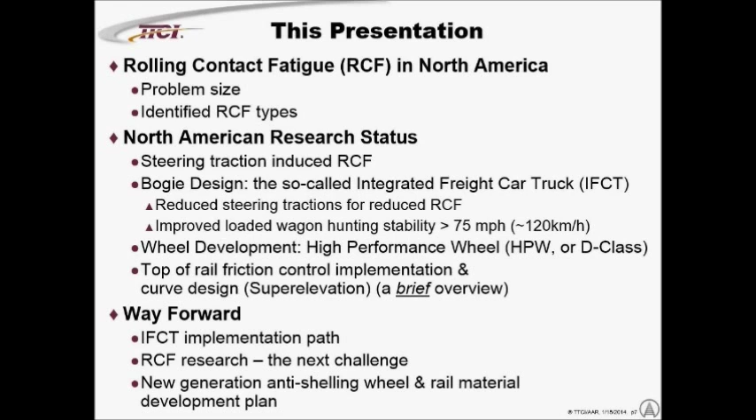And then give you a bit of an idea of what we plan as a way forward, implementing the bogie that we have developed conceptually, as well as where we want to go in terms of rolling contact fatigue research. We haven't really touched it, and we've been messing with RCF for... And where we're going in terms of maybe an anti-shelling wheel, and maybe the metallurgical community here will be interested in that. So, what is our problem size?

Basically, wheel costs in North America are of the order of 800 million US dollars. And of that, we reference this pie chart here, which is audited wheel replacements by damage code. Of that, tread defects are probably 60% of the problem size, and of this, at least 50% is associated with rolling contact fatigue, and results in what we call high-impact wheels. Wheels that go down the track going bang, bang, bang, and which you have to then remove. We estimate that the total RCF-related wheel costs annually in the US is just a little bit larger than 400 million.

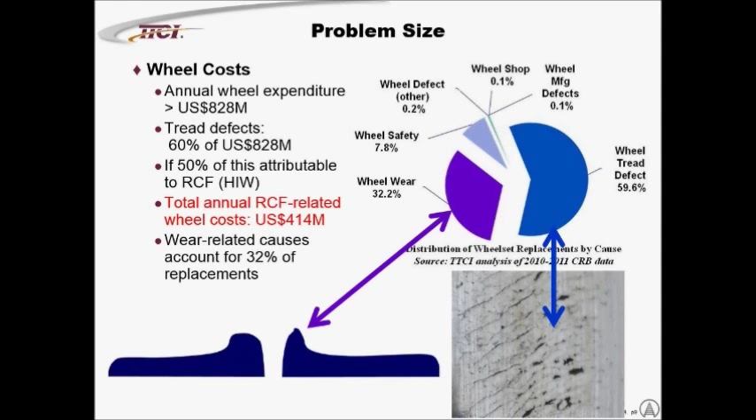Wear is not a big deal. It's something that we would really wish that wheels would be removed for wear. Wear is predictable, somewhat, and what happens when the biggest wear mode that we get is what we term asymmetric wheel flange wear. The wheel loses its steering ability and then moves against one rail in one direction and wears the flange. This is a general wear mode that we encounter in the States, and what I observed in my time in South Africa.

Wheel removals are a big problem in the US. Here we have the incidence of what we call high impact wheels. We have wheel impact detectors that are situated along the track, and if you encounter a wheel above 90 kips, 90,000 pounds on the rail, you need to look to change it out, and you're mandated to change it out if it's above 140,000 pounds. These blue skyscrapers here show you the removals, and you can see that the removals are seasonal.

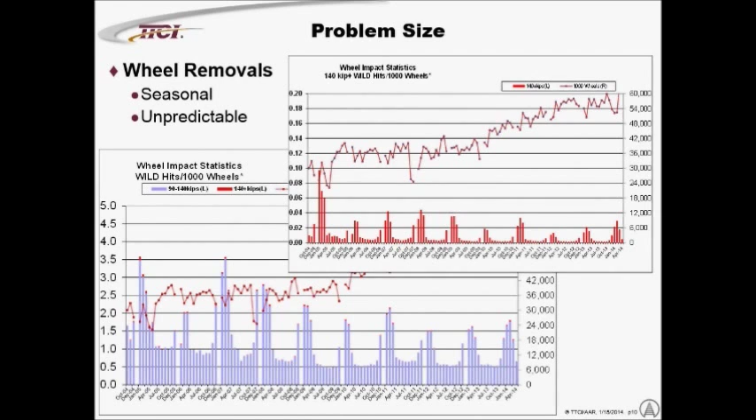They're related to the snowstorms that you encounter in North America, but not that predictable. You don't know which wheel's going to give you the problem after which snowstorm. The blue skyscrapers are the 90 kip wheels, and the red tips on these skyscrapers are the 140 kip wheels. If you look in detail at the 140 kip wheels, you see the same pattern, seasonal in every sense.

If we're looking at the rail costs, annual grinding costs in North America are around about 100 million. And if we look at RCF-related rail costs associated with replacement, totally that's a replacement of 300 million, and 100 million due to grinding. It's costing the industry also about 400 million. So our total problem size in North America relating to RCF is of the order of 800 million.

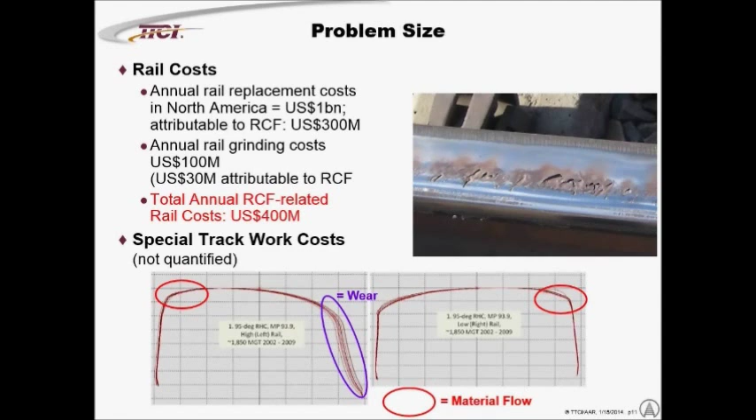What are the damage modes? Starting with the tread and the wheel, it's the easiest one to identify because unfortunately the grinding guys come along and grind the rails and remove the evidence before we have a good idea of it. We have identified three wheel damage modes.

The first, as I mentioned, is what I've termed tread scuffing, and it's associated with surface damage. What happens basically is that surface-initiated cracks form - we call them cracks, they're actually wear-related, and I will explain that a bit more. They then develop into cracks that go beneath the surface of the wheel, and eventually bits and pieces of the wheel fall out and cause so-called high-impact wheels.

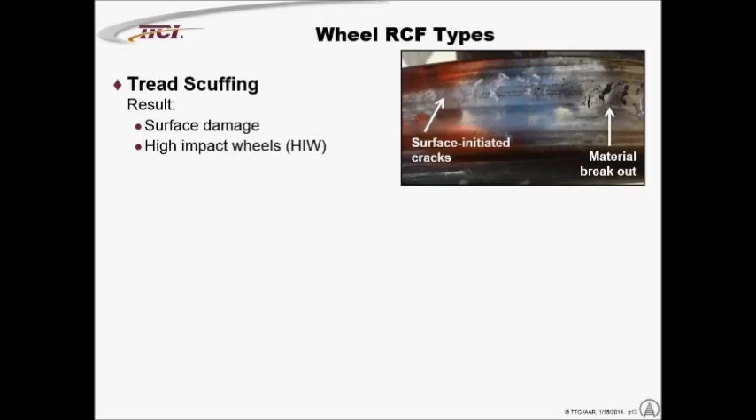There's a very closely related failure mode, which is tread shelling, associated with the Hertzian maximum shear stress beneath the surface of the wheel, and related to subsurface fatigue. What happens there is that we get delamination of the wheel. This white square here shows the delaminated portion of this tread, identified by ultrasonics. What happens then is that the delaminated portion breaks out also to form high-impact wheels.

Incidentally, if it doesn't break out, it forms a vertical split rim, which is something we'll talk about a little bit later. Then we have identified a further mode, not all that prevalent, which I have termed continuous spalling, and it's almost a skidding of the wheel.

You can see that - well, what happens is that we get little cracks forming there. It's related to heating and quenching of the wheel surface to form martensite, and this rather brittle layer then starts breaking out. It occurs under light car conditions, under empty wagon conditions more than under loaded conditions. It's currently classified as tread shells in the American jargon, just because the damage looks a little bit like a shell and is longer than 1 inch in one direction, although it's not very wide.

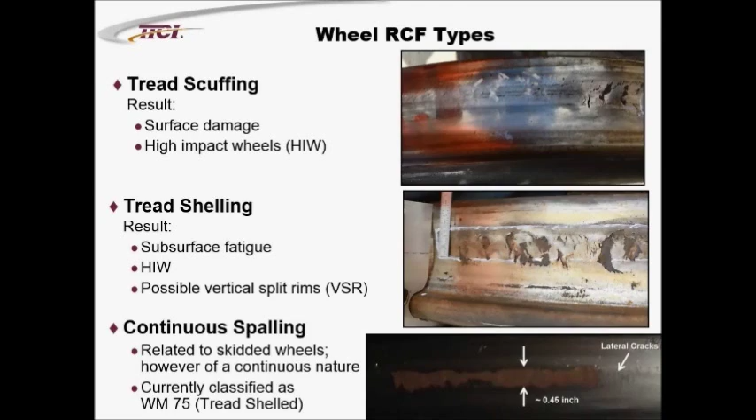As far as the rail goes, we start with something which we think is very much related to the scuffing that we see in wheels, and it generates these patterns on the rail. This is dye-penetrant of the rail, and then bits and pieces break out very similarly to what happens with the wheel.

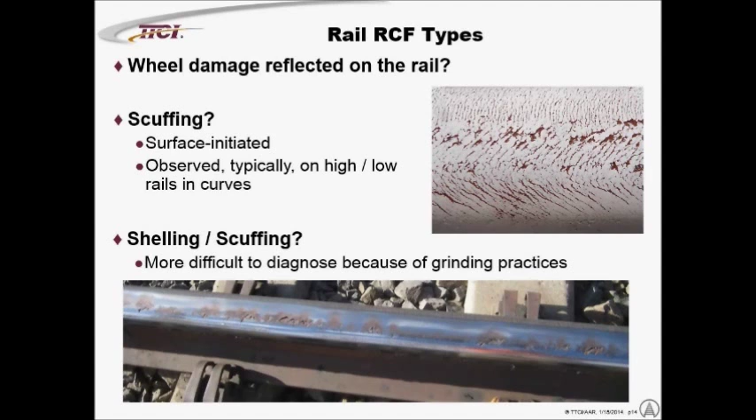And then you've got shelling as well, related to scuffing. This is a particularly bad section that we didn't grind, and this is typical of the damage.

So let's start with what we're doing about things, and we'll start with the scuffing damage, which we are addressing primarily by looking at improved bogie designs.

Before we start off, I want to define something which is what we call the traction ratio, which is the ratio of the net vector sum of the creep forces between the wheel and the rail, divided by the normal force. You can think of it as a demand for adhesion. It is not the coefficient of friction. I'll refer to it in this talk as T/N traction ratio, so we know what we're talking about.

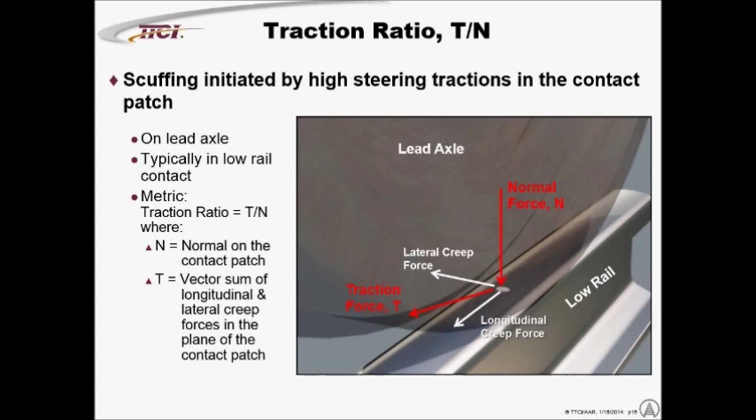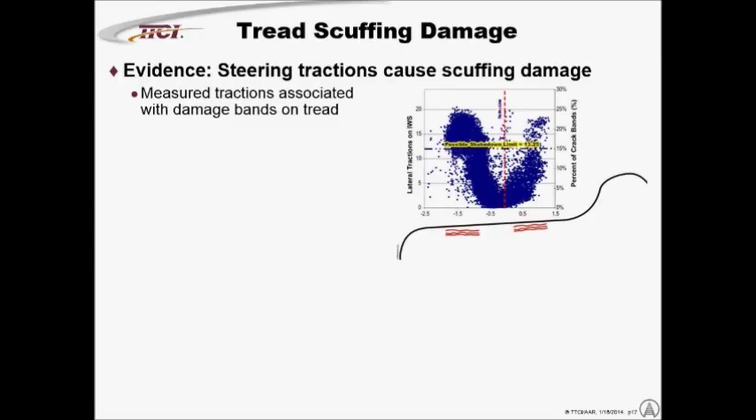If we start looking at the damage that occurs on the wheels, we find that it occurs in two bands on the wheel, a primary band here and a secondary band here. We've collected evidence as to the relationship between damage and the steering tractions. This is a scatter plot of the measured steering tractions using an instrumented wheel set, and you see that the highest steering tractions are associated with these two contact bands. So I'm just giving you a couple of pieces of evidence for the relationship with steering tractions.

Next is some data from a set of cars that ran in coal service, predominantly in one direction, 80% loaded. I looked at the wheel removals - miles to removal against the number of wheels removed for high impact wheels. You can see that axle 1, which is the lead axle in the vehicle, is experiencing a lot more removals than axle 3, which is the lead axle of the trailing bogey, the next one subject to the higher steering tractions. Axles 2 and 4, which just go along for the ride, as it were, would probably show almost nothing if they hadn't run 20% loaded in the other direction.

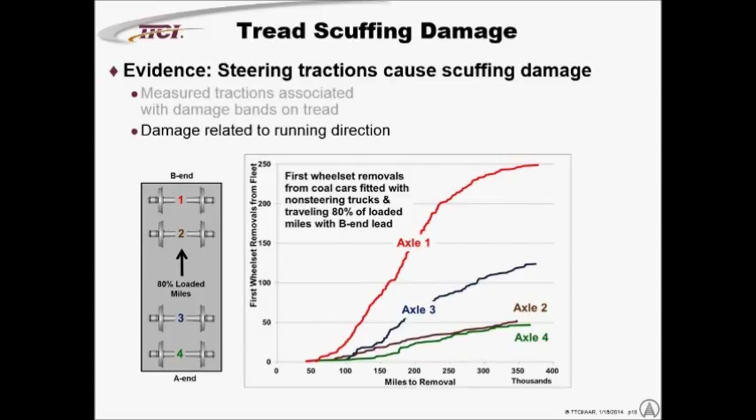So there's some more evidence of that relationship with steering tractions.

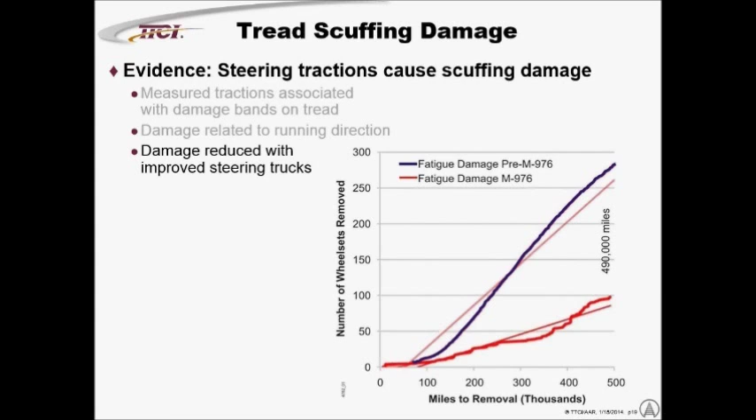Here we have the comparison of wheel removals over a period of 500,000 miles, comparing a traditional three-piece bogey with a bogey that has better steering performance. You can see again that there's a direct relationship to steering tractions.

We've also experimented with this. I borrowed a rolling rig up in Canada and introduced steering tractions between the wheel and a set of rollers underneath the platform, plotting the relationship of the steering tractions to the angle of attack of the wheel set.

That's the angle that the wheel set takes up on the track relative to the longitudinal centerline of the track. You can see here that as we get into high tractions on the order of 0.3 to 0.4 demand for adhesion, the wheel moves from a typically burnished surface to one that develops pitting on the tread surface.

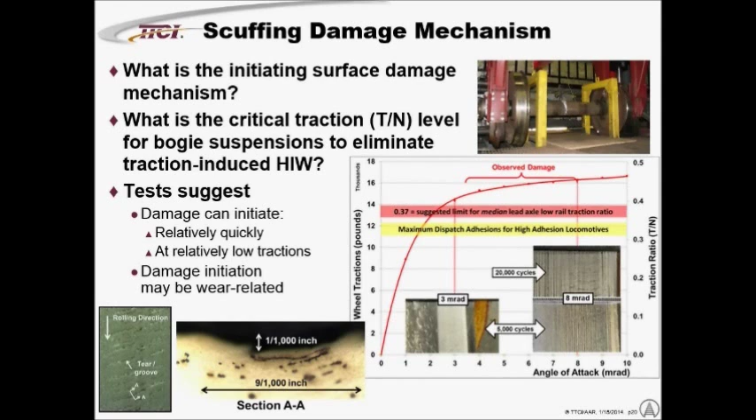And these pits are not cracks, they are actual erosion pits in the surface of the wheel, associated, I believe, with stick-slip, a sort of semi-micro corrugation under these high traction loads. To understand this a bit more, we need to dig into the so-called creep theory.

In creep theory, we look at the relationship of the relative slip between the wheel and the rail and the traction that is imposed. I've got a little video here which gives an idea of what's happening, because in the contact patch between the wheel and the rail, we see both adhesion and slip.

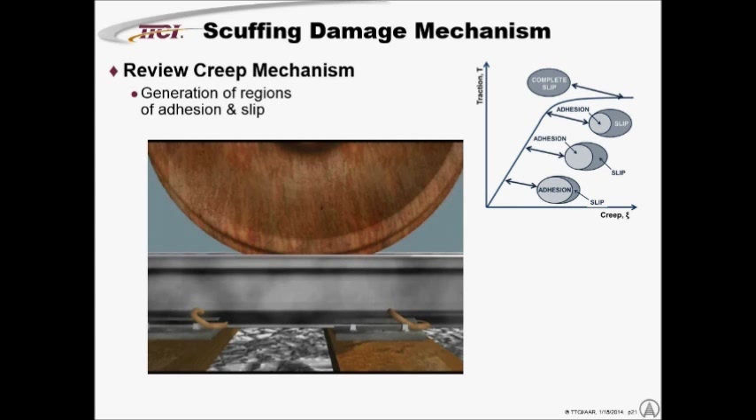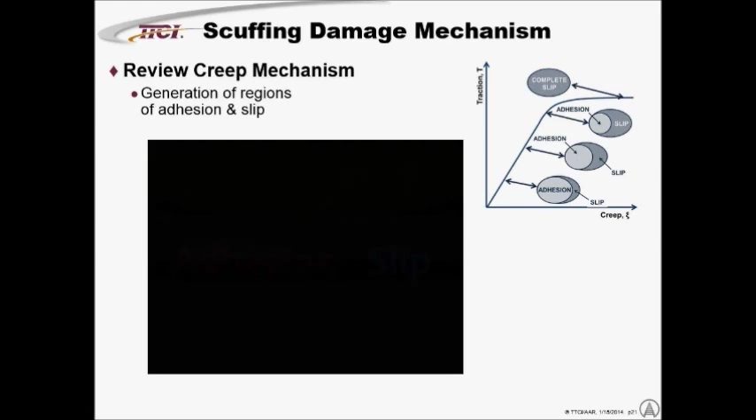Some people find it difficult to visualize how you can get adhesion and slip simultaneously. Here we see the wheel rolling on the rail, and elements of the wheel and rail come into contact in different states of strain. As they roll through the contact patch, the relative strain between the wheel and rail increases until slip occurs on the trailing edge of the contact patch. If you look deep into the contact patch...

you will find that there's a normal pressure distribution over the contact patch. But if you look in the area of adhesion and slip, you can see that relatively high tractions occur in the contact patch, even with relatively low overall tractions. So you're getting limiting slip incrementally, specifically at certain places in the contact patch.

We've done a contact patch analysis of the stress state on the surface of the contact patch, and you'll see that at the transition between the area of adhesion and the area of slip, we generate von Mises stresses on the order of 180,000 psi — for those of you who are metrified, that's pretty close to the UTS of the steel.

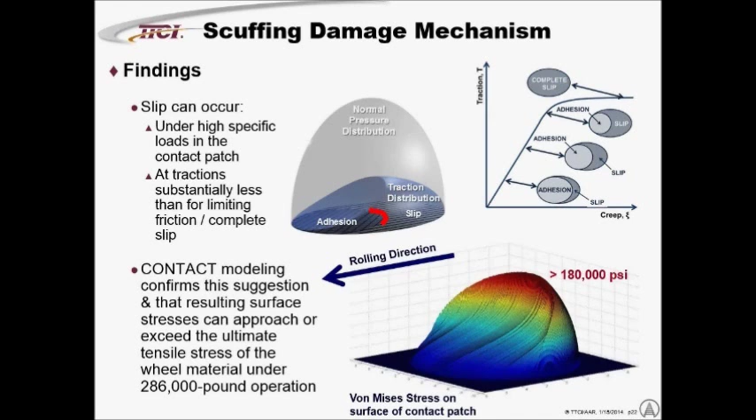So I'm thinking that what we're doing is ripping bits and pieces out of the wheel under these conditions, and that's initiating rolling contact fatigue.

Typically, if you look at the UTS of steels at room temperature and at elevated temperatures due to braking of the wheel, and plot that against the curvature in degrees of the curve the vehicle is trying to steer through, you find that when we plot these surface stresses against the curvature, rather than against the creepage, we're reaching very high stresses beyond ultimate in 4, 5, 6, 7 degree curves.

And that is when everything is going well — that's not even when you're traveling at underbalanced speeds and so on. I'll talk to that a little bit later.

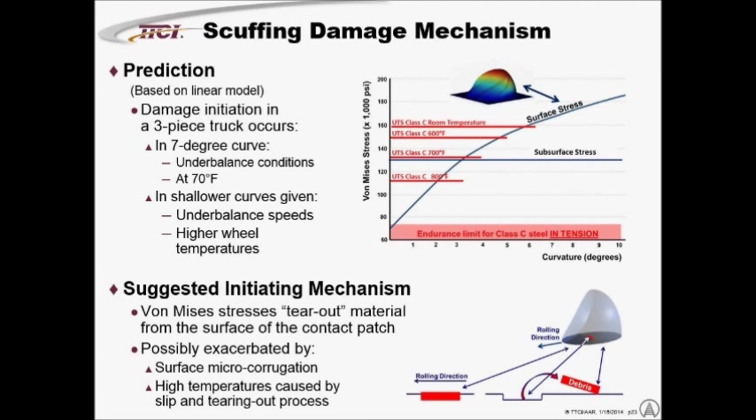So what we think is happening, and what we want to pursue, is that these very high stresses result in material being torn out of the surface, much as I showed in that cross-section a couple of slides back. This may be exacerbated by micro-corrugation, high temperatures, and so on, creating a void in the surface of the material, and that void allows the material to flow.

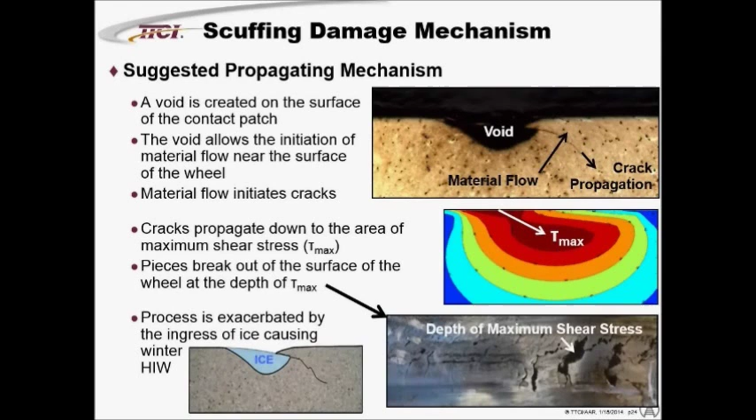And when the material starts flowing, you can begin initiating cracks. If you try to conceive of cracks just appearing in the contact patch without a void, it's very difficult, but if you think of a void, that's definitely an initiator. These cracks are then driven down to the maximum shear stress and break out of the surface. We believe that ice forming and being pressed into these voids accelerates the generation of cracks and the initiation of high impact wheels, as we observe in service.

So we're coming to the conclusion that maybe this damage mechanism is not a traditional fatigue problem. It's maybe a wear-related problem initially. The damage that you can generate in the experiment on the rolling load machine, you can get that damage after 5,000 cycles. It's as early as that.

And so the damage is also statistically related, because the high load cycles on a particular spot on the wheel have got to occur repeatedly on the same spot as the wheel is rotating and as the dynamics of the wheel sees the track. They are associated with low rail contact and not with high rail contact. So you've got to relate the number of load cycles also to left and right hand curves.

The vehicle is also either loaded or not loaded, and it's operating in a lead or a trail manner. And then, of course, you've got the incidence of curvature, which drops off very rapidly in North American conditions. So you've got to get all of these things coming together in order to generate these high impact wheels.

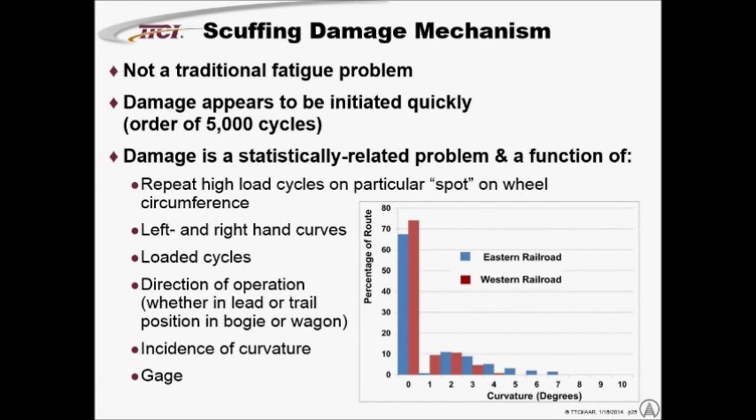What are we doing about it? We developed a design concept which is based on the three-piece bogey, which you typically use in freight operations. And the three-piece bogey has a lot of merits. It's rough, it's robust. Its particular design allows it to go over very uneven tracks, which you typically find out there.

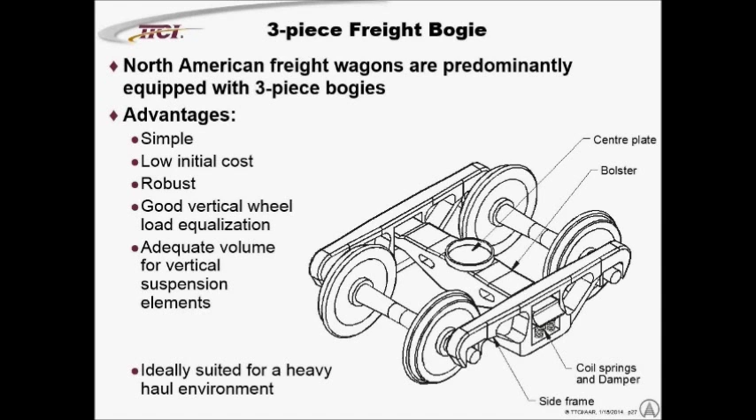And it has the property of having the coil springs and the dampers in the system located only at two points in the bogey, and also where there's a lot of volume to accommodate the deflections and the volume required for very high heavy axle load conditions.

So the disadvantage, though, is that the wheel set can take up an angle of attack, and when it does so, it slides laterally against the flange and continues to slide on the low rail, developing a lateral creep force, and this is the force that starts to generate the damage that we talk about.

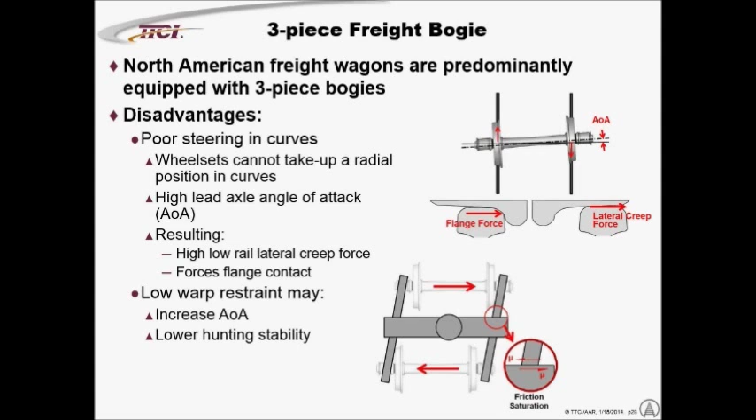The other thing that it does, which is undesirable, is that it has what we call a low warp restraint. That means that the two wheel sets can move laterally in opposite senses relative to each other, and that initiates certain instabilities and poor curving modes that we'll touch on a bit later.

So what we did in our design was to introduce what we call an adapter pad on top of the adapter, and that allows the wheel sets to angle themselves somewhat radially in the curve and reduce the angle of attack and reduce the creep forces between the wheel and the rail.

It's not a radial truck. I worked for 20 years in radial truck design, and the radial truck does a lot better than this particular bogey, but it's a lot more expensive, and costs and benefits need to be considered.

But as soon as you relieve the longitudinal constraint of the adapter pad on the wheel set, you set up the ability of the wheels to start hunting. It's a lateral instability of the wheel set on the track, and in order to avoid that, we have introduced—

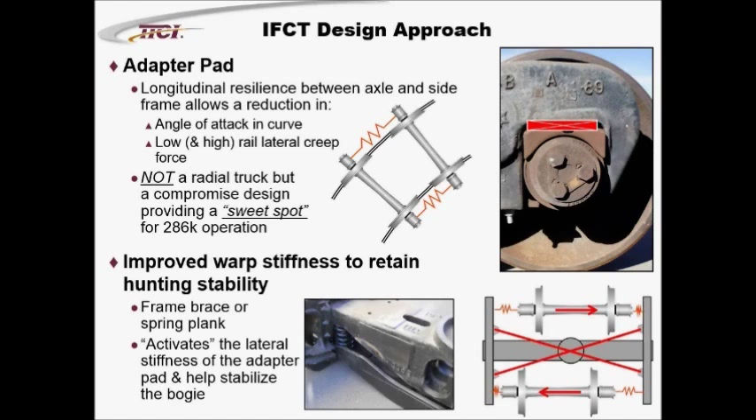in the design concept either frame braces or a spring plank which holds the two wheels laterally in a lot stiffer mode, and in doing so enables stability of the vehicle. In our jargon, it activates the lateral stiffness of the pad, and the lateral stiffness of the pad introduces reaction forces on the wheel set, which then stabilizes the wheel set.

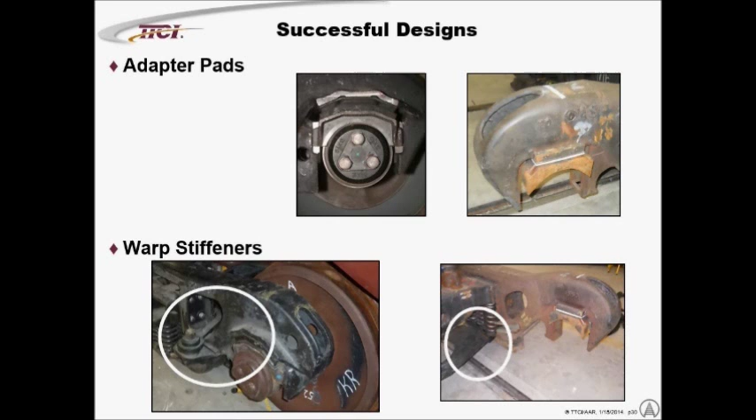Then the next thing is to say, well, okay, we've got these things. How do we evaluate a new bogie? What we've done is we put together two loaded cars, one after the other, one with a standard three-piece truck underneath the vehicle, and the other with what we call the improved freight car truck, and we then compare them as we roll them around the track.

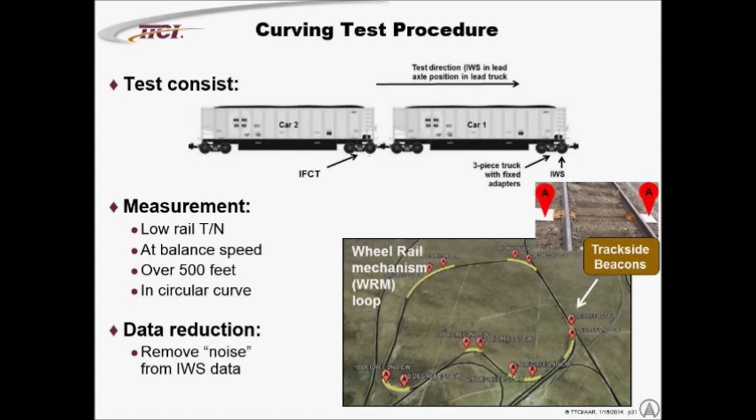And we've got this track out at TTC, which is what we call the wheel rail mechanism loop, and it has a number of different curves from 12-degree curve down to 3, and we precisely measure the steering tractions in the circular curves and then compare them, as I'll show you a little bit in the next slides.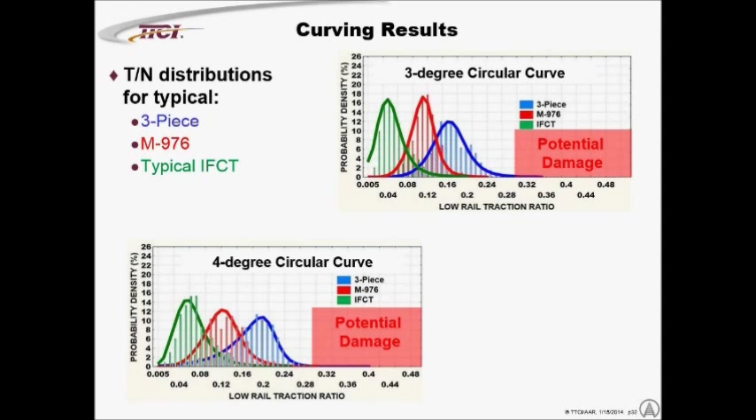In a 4-degree curve, the tractions become somewhat higher, and in a 5-degree curve they are in turn higher, and you can see damage starting on the 3-piece bogey. Then in a 7.5-degree curve, we still are able to maintain reasonably low tractions.

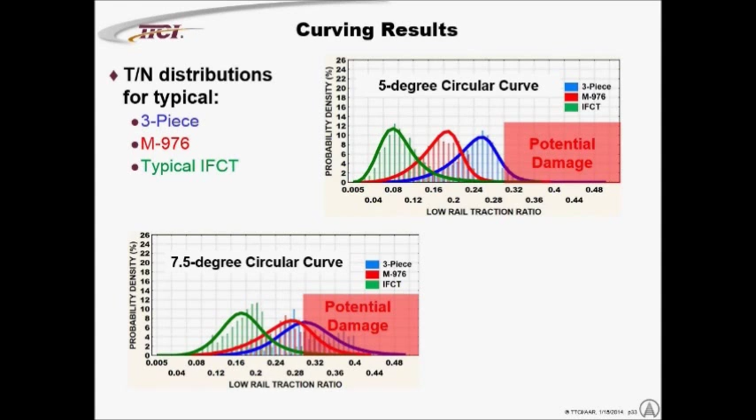In the tighter curves, 10 and 12-degree curve, we don't really get much improvement. But as I said earlier, this is not a radial bogey, it's a self-steering bogey. This is a compromise for the American environment.

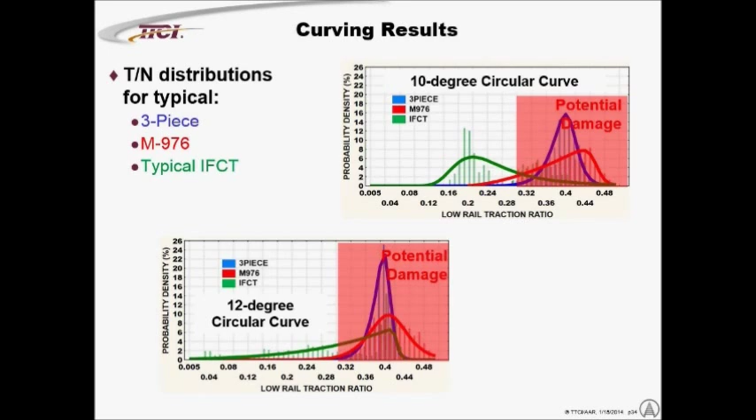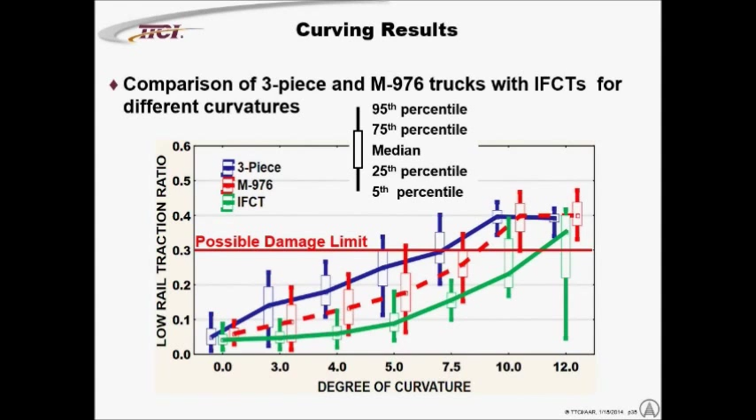This is a summary of all this data in terms of the degree of curvature against the traction ratio generated. The blue is the plot of the medians of traction ratio for a 3-piece bogey, this is the so-called M976, and this is our improved freight car truck. So we get much improved steering tractions between the wheel and the rail.

So basically, we have a vehicle that can curve properly and is stable under empty conditions. It's also stable under loaded conditions.

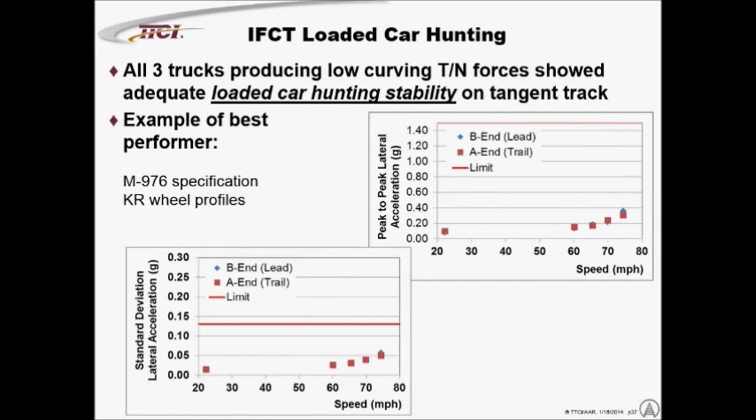Then we go into the rather obscure test regimes we have in North America for pitch and bounce, twist and roll, where we excite the vehicle suspension at or near the resonance frequency. Because we have only friction damping, it's quite a tough test to pass.

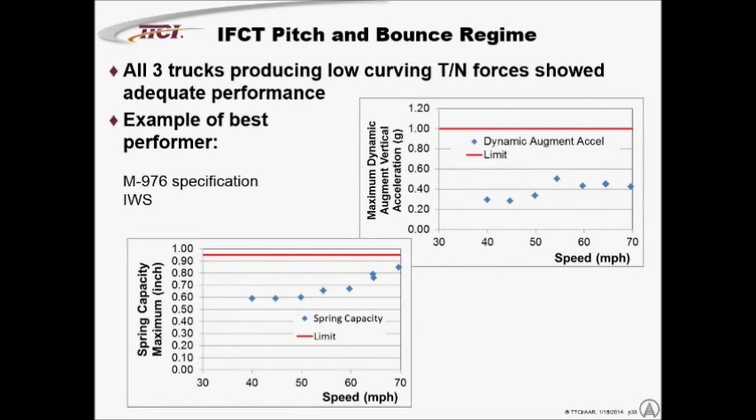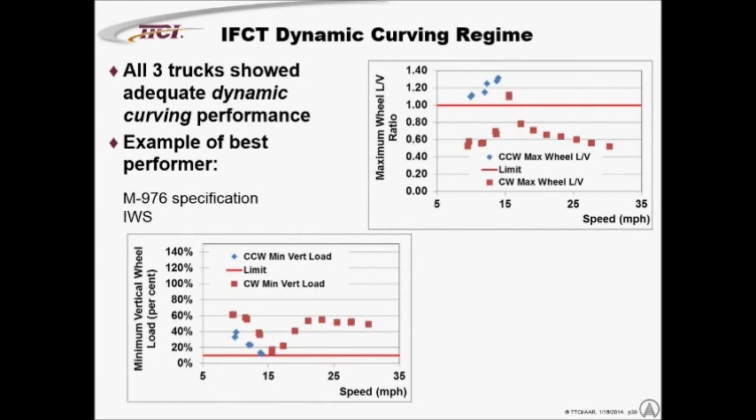You can see it does pretty well here. There are issues in dynamic curving where we hit resonance at 15, 16 miles an hour, and we lose our vertical wheel load. We believe this particular bogey can be modified to accommodate that.

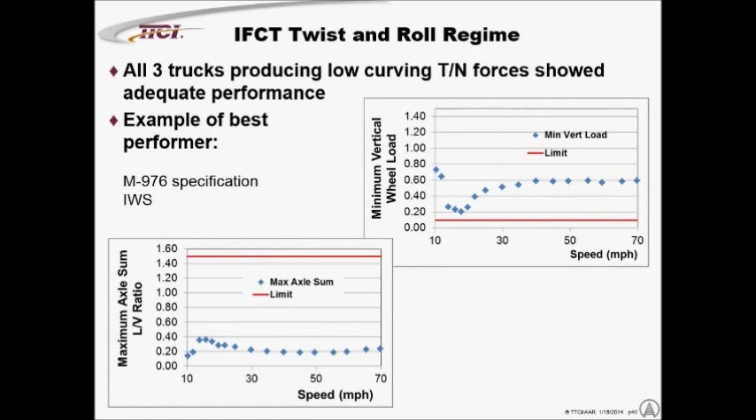So what our tests suggest is that if we allow some longitudinal stiffness at the axle boxes and at the adapters, and somehow brace the bogey against lozenging or warp, we activate the suspension laterally, and this allows the vehicle to be stable.

We recommend, or we suggest, that you use these bracings. There are some suppliers still using the traditional wedge design, for those of you familiar with that, which sometimes works and sometimes doesn't.

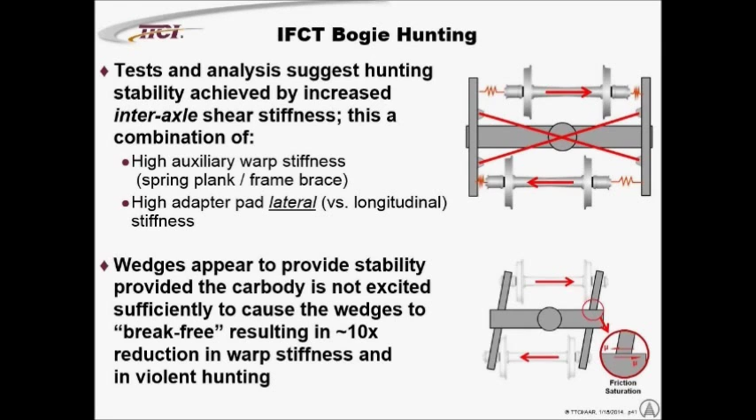The wedges are in a stick-slip mode, and when they stick, the vehicle is stable. When they slip, you tend to lose the warp stiffness between the bolster and the side frame of the bogey, and you introduce rather violent hunting, getting almost a 10 times reduction in the warp stiffness of the bogey under those conditions, for those of you who might be dynamically interested.

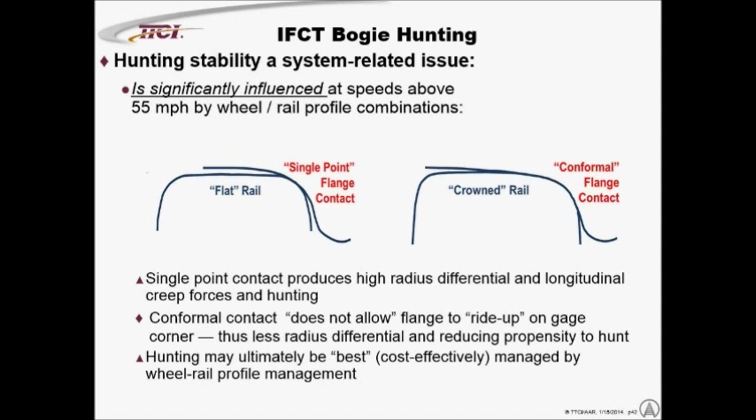Hunting stability is also a function of the rail and wheel profiles, and we recommend you address the gauge corner flange contact in a so-called conformal flange and crown rail condition, pretty much as we recommended 15, 20 years back, rather than single point contact, which produces very high conicity, very high steering forces, causes the vehicle to be unstable, and results in very high contact stresses on the gauge corner of the rail.

We also looked at the accuracy of alignment of the two wheel sets relative to each other using our so-called instrumented wheel sets. You can see here that if you have radial misalignment of the bogey, you'll find that the vehicle... this is now curvature against the traction ratio developed.

You'll see that it goes easier around one sense of curve and not around another, which is also a reason why often you get high impact wheels occurring on only one wheel of an axle and not on both.

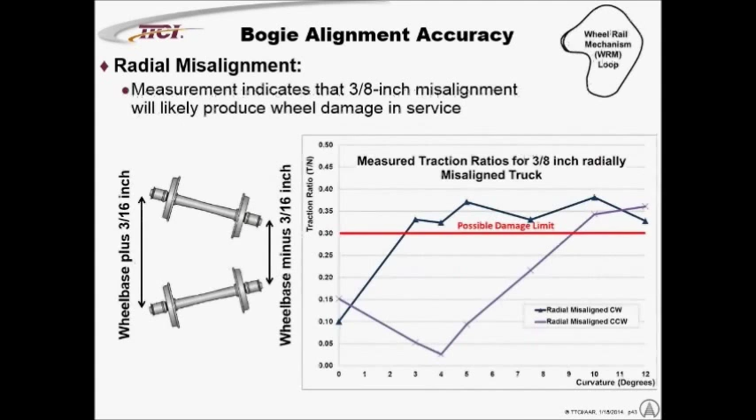In terms of the warp stiffness... excuse me, this was a deliberately misaligned bogey with a particular misalignment.

Here we are within particular limits of a 1/16th of an inch difference in wheelbase, and we find that the steering tractions are very similar, and probably that's about as accurate as you're going to get in a bogey just out of the shop, out of the foundry, out of being assembled, and that's typically the range of misalignments we encounter in service.

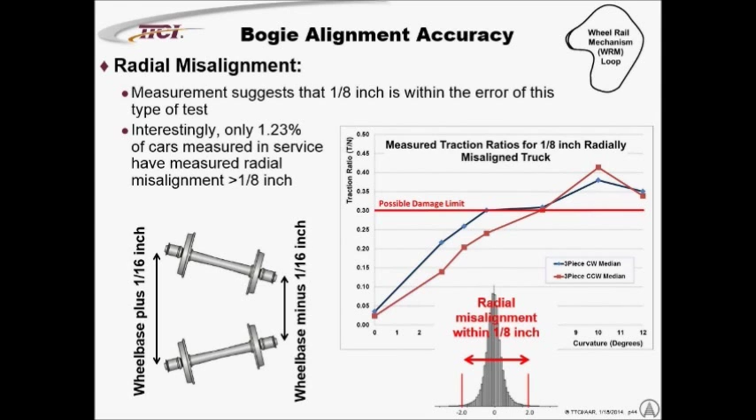Here's a histogram of what we measure out in service.

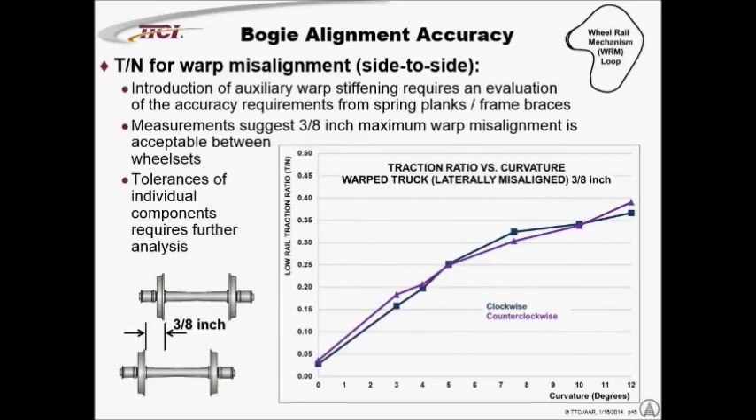In terms of warp misalignment, as soon as you constrain the two wheel sets laterally relative to each other, you've got to be careful of not introducing adverse steering conditions, pretty much like the wheel alignment on your car. We found that within 3/8 of an inch that the two wheels are misaligned relative to each other, we don't get too much of a difference in forces.

From one curve to another, clockwise to counterclockwise, we think that at this stage we've got a bogey which is capable of being rather friendly to the wheel and to the rail, but we don't put all our eggs in one basket.

We're also looking at improved wheel steels beyond the so-called C-class that is prevalent in North America. We are referencing now the Class D, and we had wheel suppliers produce the Class D wheel to the new specification, and we then tested these wheels in service, and you'll get a bit of an idea of the difference in performance.

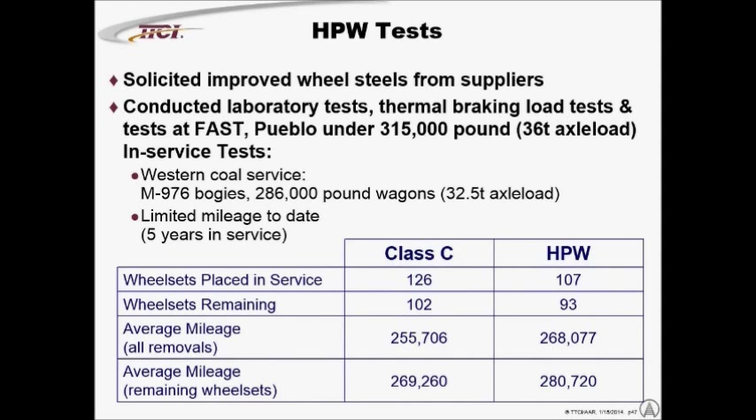Here is a very limited test of a number of wheel sets placed in service. I won't go through the gory details, but basically we've done 250,000 miles at this stage on these wheels. We are looking at wheel removals as a percentage against the miles to removal.

We're looking at it in a log form associated with the Weibull approach to analyzing these failures. If you use the Weibull analysis, the slope of the curve gives you an indication of the type of failure, whether there's infant mortality or whether there's a wear or fatigue mode kicking in. And the so-called scale factor gives you the miles to removal.

The 63.2 percentile of removals. So how many miles to failure at 63.2% of removals. That gives you a bit of an idea of Weibull.

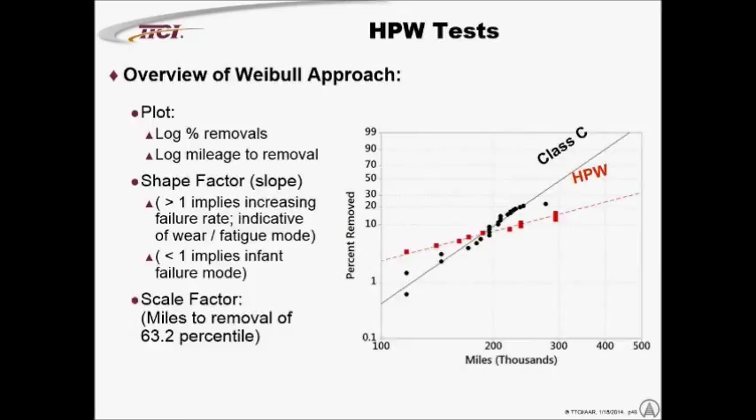And if we plot Weibull for all our wheels, comparing C-Class and the high-performance wheel, and we look at all removals, there's not much of a difference. There is a certain difference, but these are all removals.

This is for bearings, for what we call owner removed. Sometimes the owner removes a wheel for various reasons known only to himself.

So we took out all the other removals and looked at just high impact wheels, and this is the sort of improvement that we can get. We're looking at improving the wheels, the miles to removal from 336 to 543. That's a big deal if you think of our cost of removals of 800 million.

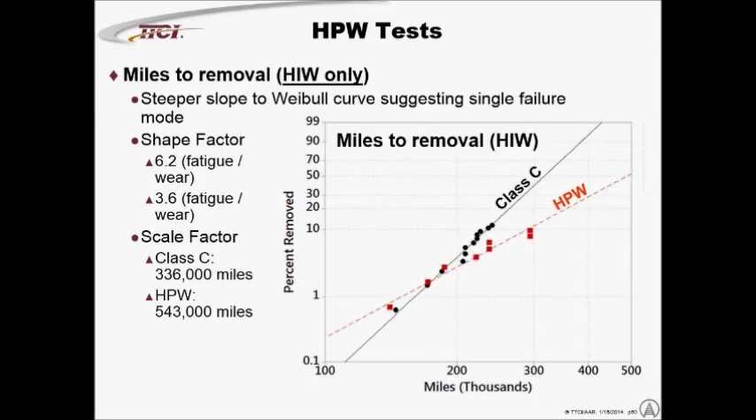Interestingly enough, as I said, the steering tractions are the big deal as to the formation of high impact wheels. And here you see axles 1 and 4 separated out against axles 2 and 3 for C-Class wheels in a truck with a modicum of good steering.

So we still haven't, just by that so-called M976 bogey that we put in, haven't really fully addressed the removal due to steering tractions, hence our so-called high or improved freight car truck bogey that we're looking at.

However, if you look at the removals for C-Class wheels, if you look at the removals for D-Class wheels, the jury's still out. Axles 1 and 4 and 2 and 3, in fact, axles 1 and 4 are doing better than 2 and 3 at this stage. But there are very few removals at this stage.

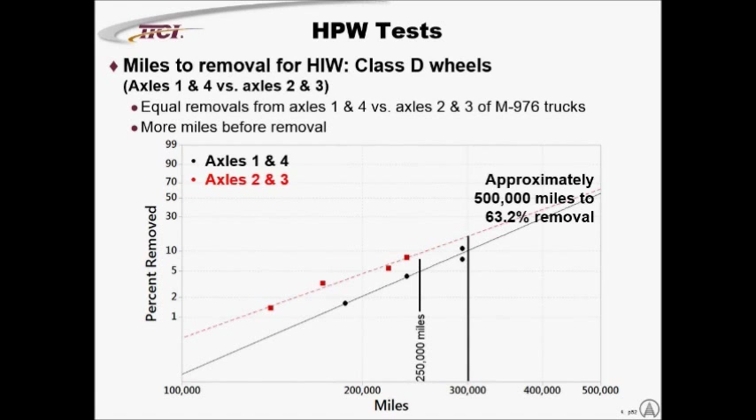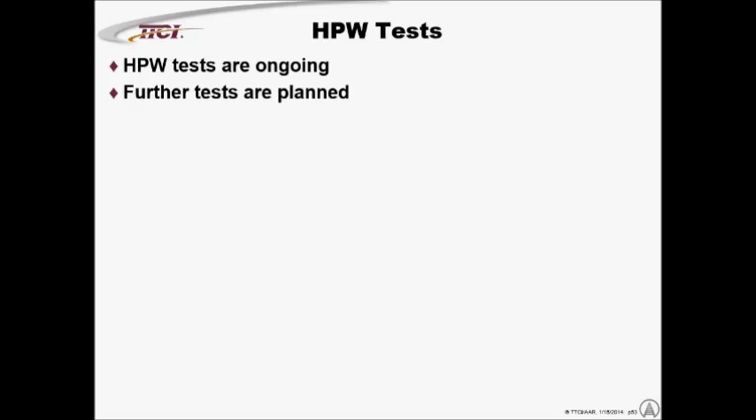So let's just see how things pan out beyond 300,000 miles in service. As far as the high-performance wheel tests go, certainly they're still ongoing, and we plan further tests and introducing further wheels into service. As far as top-of-rail friction control, if we're looking at the demand for adhesion between the wheel and the rail.

If you can put some form of friction control, reduce the tractions between the wheel and the rail, surely you can improve the rolling contact fatigue. And yes, there is an improvement. Here's an improvement wear related on the low rail of curves that we've measured, and on the high rail of curves, and there is a degree of improvement.

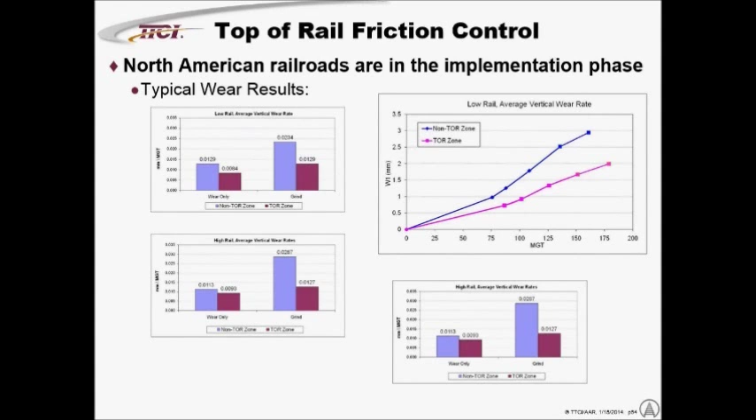But remember, you can't reduce the friction between the wheel and the rail too far, because of course the locomotives have still got to pull the trains. So there's only a certain limit to what you can do. Even with improving top-of-rail friction control, you can still see these traction-related damage that is occurring on the surface of the wheel and of the rail.

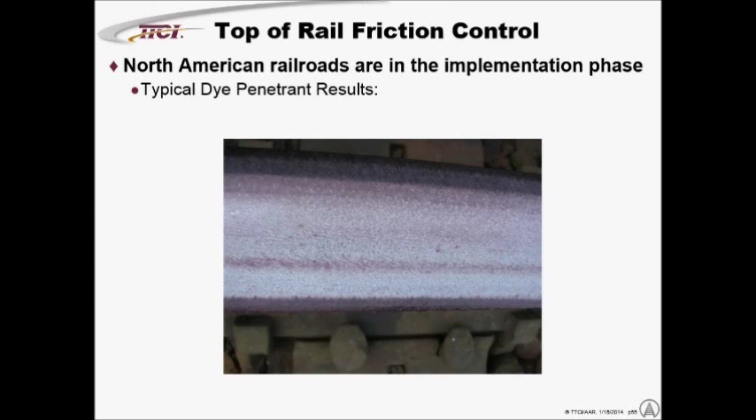Another aspect is super elevation. What do we do in curves? We bank the curves, we put in cant in order to introduce a force to counteract the centrifugal force that the vehicle experiences. However, that's okay if you're going at the particular design speed in a curve, but if you're not, you run into problems.

Typically this is a topic in North America where they want to use mixed passenger freight operations. You've got a track that's banked to accommodate high-speed passenger, and you come along with very heavy freight cars. What do they do in these curves? They start curving with a higher angle of attack in order to generate the creep forces necessary to counter the deficiency of the cant on the track.

So what is our way forward? We've developed this integrated freight car truck design. We've evaluated four different bogie types, and we're going to first put them out on our so-called fast track facility for accelerated tests, where we run a 100-car train around in circles.

This train doesn't have a driver or anything, it operates remotely, and this thing just goes round and round and round, and damages the track and damages the vehicles, and we get an idea of what's happening. So we're running those bogies at this stage at FAST, and then we're also defining component load environment.

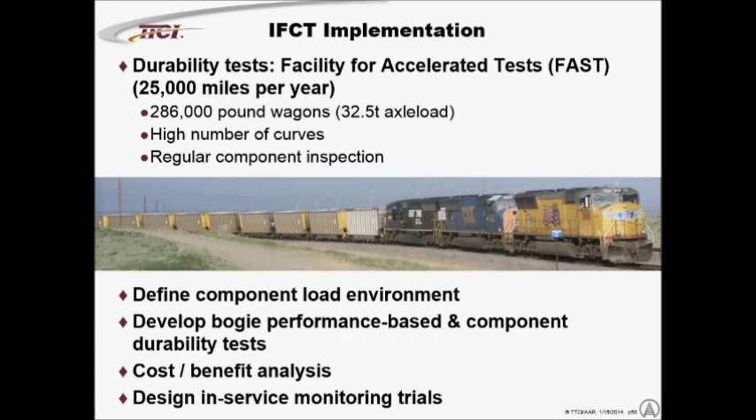We're introducing new components into the suspension system, so we better know about the load environment, and that load being also a heat and temperature environment. And then we will develop performance-based durability tests and criteria, and we're conducting a cost-benefit analysis of this whole lot, and we're looking to monitor these bogies in service.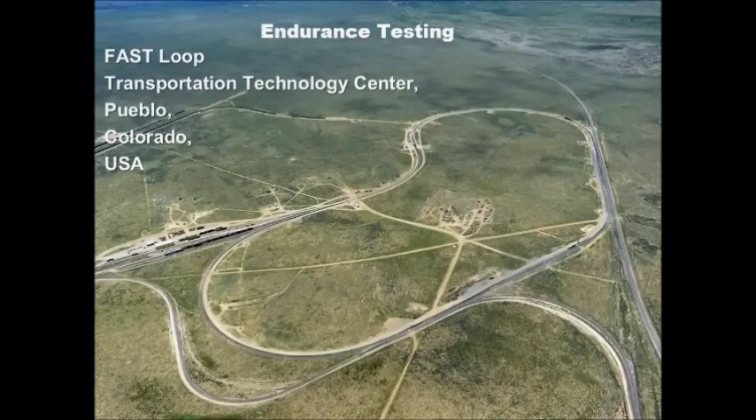Just to give you an idea, out in the flat prairies of Pueblo, Colorado, this is the FAST facility where we operate our automated train. It's about 4.5 miles that this train goes around in circles. And that track, the so-called wheel-rail mechanism track that I used to test the curving ability of the vehicles, is around here. It then completes a circle below the level of this photograph.

In terms of rolling contact fatigue research, we've looked and talked a lot about the surface-induced tractions. I mentioned earlier about the subsurface induced tractions. We're developing, we've now built a so-called rolling load machine, where we hold a complete full-scale wheel set in a test rig, and then we oscillate a piece of track backwards and forwards underneath this wheel, guiding it at various angles of attack.

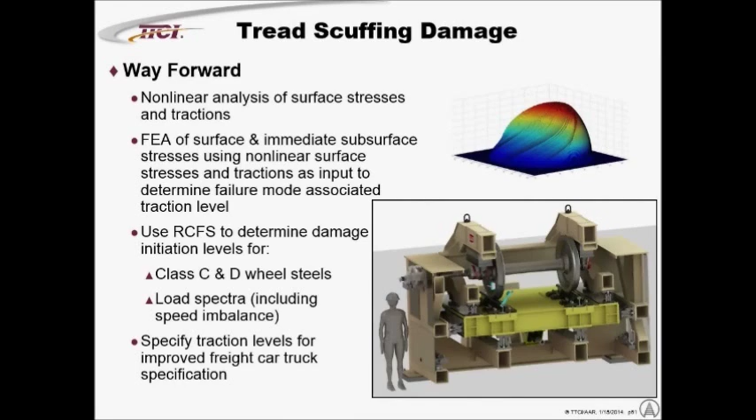Steve, what we do is the wheel here is a passive partner - the track presses up on the wheel, just to prove a point. And so we're going into that business, we're looking at quantifying the maximum shear stress, or the fatigue resistance of the wheel to maximum shear stress.

Here you see under low tractions, you still get this subsurface stress. The high tractions also generate stress on the surface of the wheel, and here's typical delamination that we're getting in wheels, and they cause a lot of trouble. If you let the delamination become too big and get it to approach the field side of the rail, then bits and pieces of the wheel fall off and cause derailments and that sort of thing.

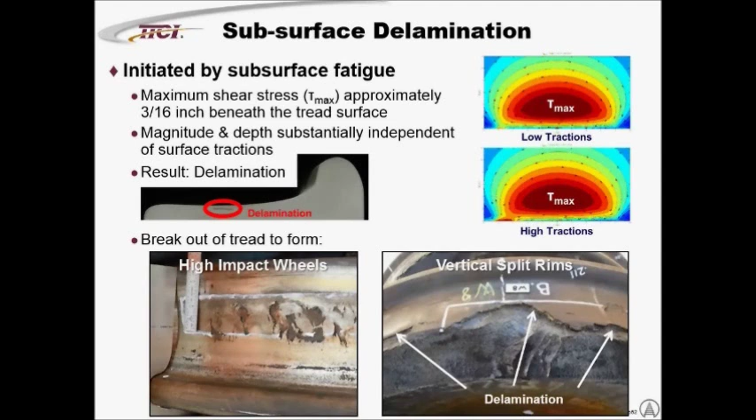What are we going to do about it? We intend doing the fatigue, subsurface fatigue analysis under various temperatures of wheel, and here's the subsurface stress - this is the nominal von Mises stress in the wheel at around 130 plus thousand psi. It is of concern to us that this delamination in wheels is occurring in a rather prevalent manner.

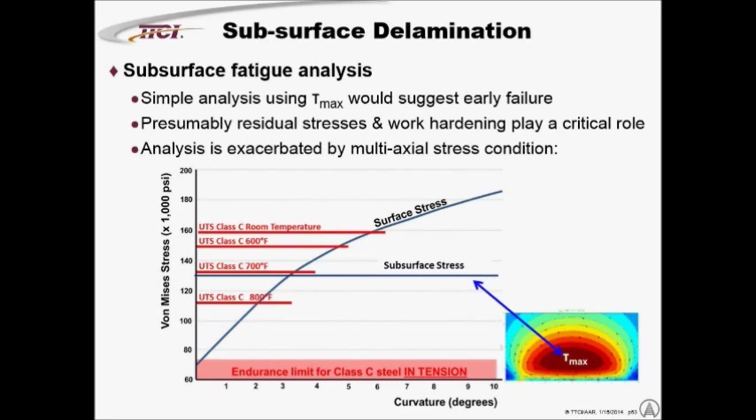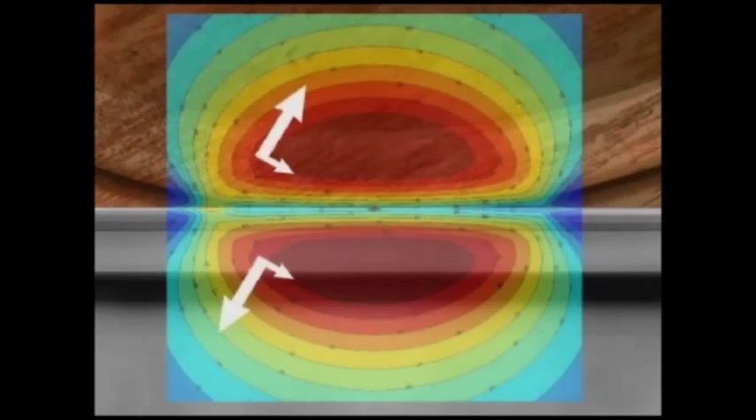The big deal with analyzing these stresses is that, of course, they're multi-axial in nature. So not only does an element of the wheel and the rail see a varying stress state, but the direction of the stresses also changes. So we need to do rather sophisticated analysis in that direction.

Also, of course, the wheel moves laterally on the rail, and so with a particularly new conical wheel on a rail, the number of cycles that this maximum shear stress sees at the center of the rail is quite high, because the motion that the element of the wheel sees is not that great. Whereas if you have a more hollow wear, maybe you get a longer fatigue life, because an element of the wheel sees fewer cycles.

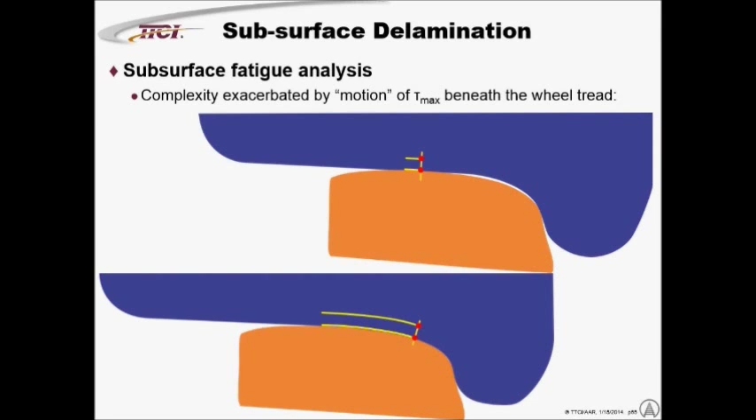This is the machine we've just built, where the track presses up on the wheel. We control the vertical load. We can simulate underbalance, overbalance conditions in curves, and the whole yellow part - the table, the track - is capable of being aligned at different angles of attack to simulate different curvatures. So this is the latest toy, it's just arrived two weeks ago, and I'm busy trying to get the thing into service.

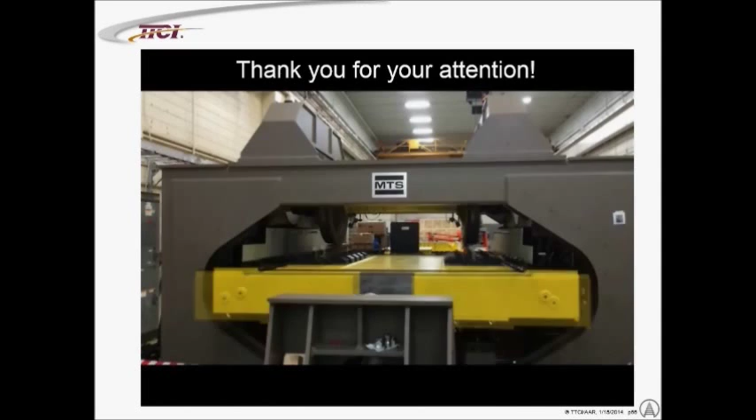And this is typically what it does - it's a bit like watching paint dry. So with that, Ravi, I'll conclude my presentation.